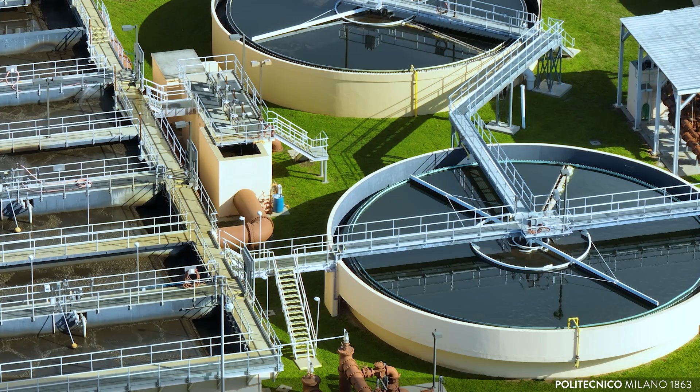In recent decades, wastewater treatment plants have undergone a profound evolution. There has been a significant increase in the required removal levels and an expansion of the range of pollutants to be treated. At the same time, increasing emphasis has been placed on process optimization, with the goal of reducing energy consumption and minimizing space requirements. Moreover, today wastewater is increasingly recognized as a valuable resource to be utilized for the recovery of energy and materials.

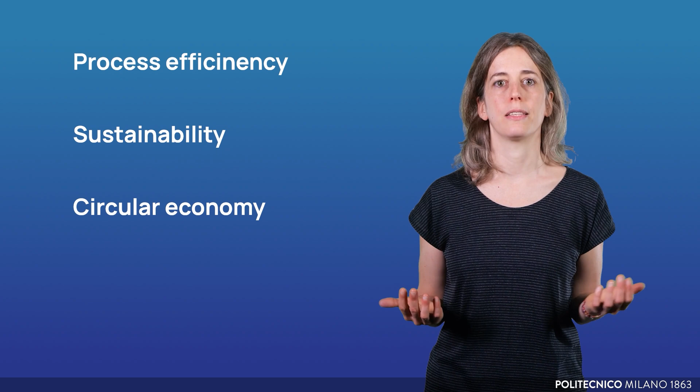The recent European Directive on Urban Wastewater Treatment, EU Directive 2024/3019, provides clear guidance in these directions, introducing particularly ambitious new objectives. In this lesson, we will analyze these changes, along with the strategies and the technologies currently available to achieve the proposed goals. In particular, we will focus on the implementation of innovative treatment solutions capable of combining process efficiency with the principles of sustainability and the circular economy. These solutions aim to address the challenges related to water and energy supply, the protection of natural resources, and the continuous improvement of quality standards.

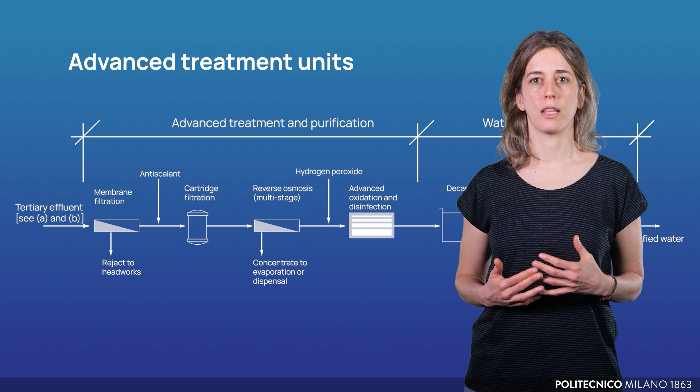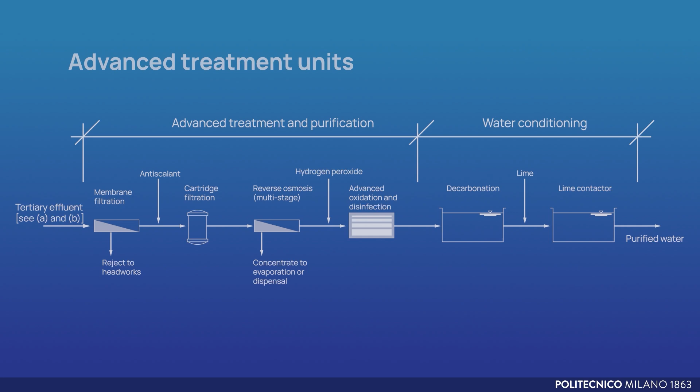Among the main challenges related to treatment efficiency are emerging contaminants, organic and inorganic substances present in wastewater even in small quantities, but potentially harmful to the environment and human health. To address this, advanced treatment units are now being used, generally positioned downstream of tertiary treatments. Based on physicochemical processes, these technologies are designed to remove residual microcontaminants, improving the quality of the final discharge and enabling the safe reuse of treated water. The processes used for the removal of these constituents can be divided into two main categories: mass transfer separation and chemical transformation.

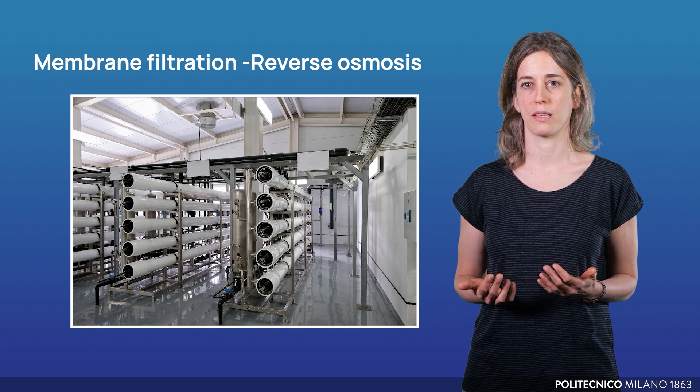The former generate concentrated streams that require subsequent management, treatment, or disposal. For example, adsorption involves the saturation of a solid medium, while membrane treatments produce a concentrated liquid waste, also known as brine. The latter are based on redox reactions that transform or destroy the contaminants. Although they require the dosing of reagents or the use of energy, they can theoretically achieve complete mineralization, except in cases of partial degradation. Among the most effective are advanced oxidation processes that use hydroxyl radicals or ultraviolet photons.

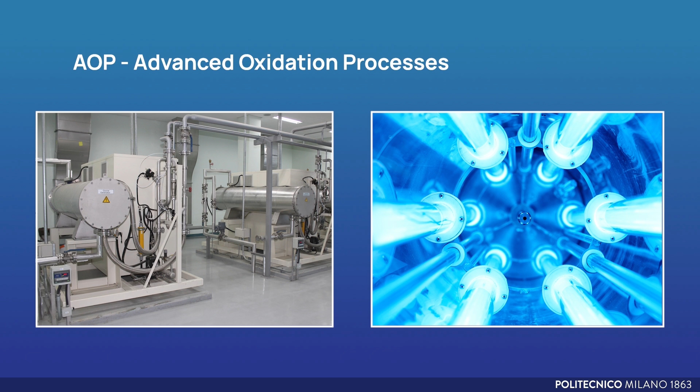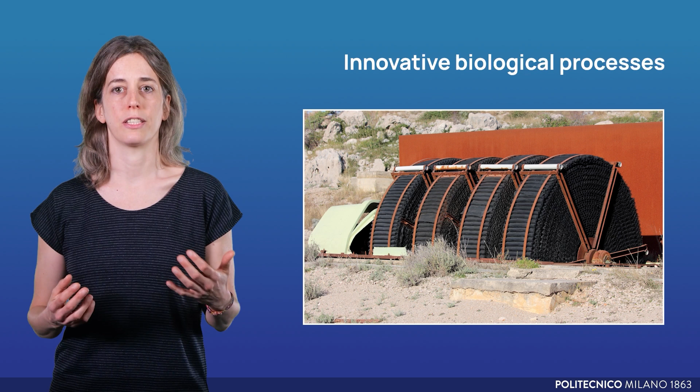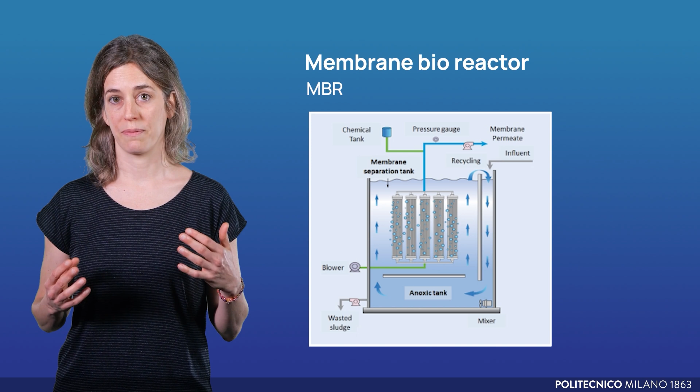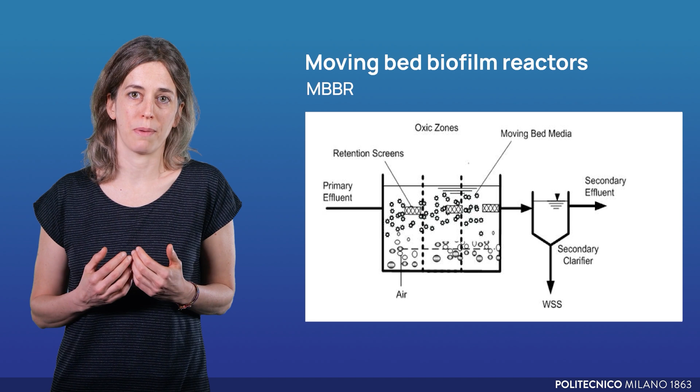In recent decades, there has also been a strong push for innovation in biological processes, with the aim of reducing the energy consumption associated with treatments, improving purification efficiency, optimizing space requirements, enhancing flexibility in response to variations in load and flow, and promoting resource recovery. Examples include membrane bioreactors, known as MBRs, and attached growth biomass systems, such as MBBRs. Both ensure a high-quality effluent and compact plant design. MBR reactors, however, involve higher energy and management costs related to aeration and membrane cleaning.

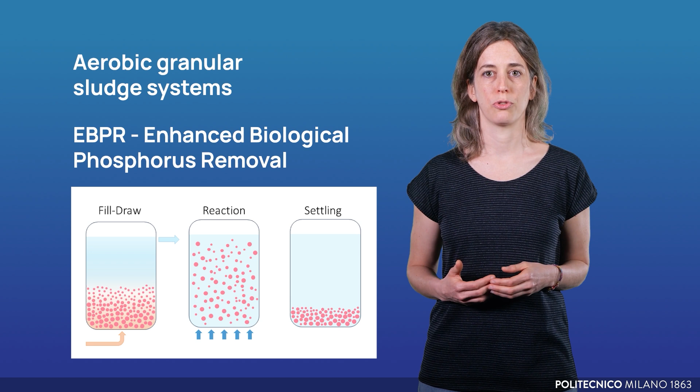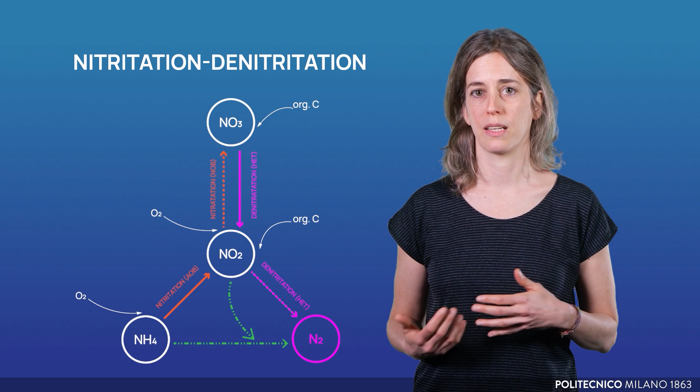Further innovations include aerobic granular sludge reactors and EBPR processes for advanced phosphorus removal. These technologies allow for a significant reduction in oxygen consumption, high sedimentation rates with smaller footprints, and more efficient microbiological selection, thus ensuring high performance. The removal of ammoniacal nitrogen from concentrated streams, such as sludge line recirculation flows, can be optimized using dedicated processes like partial nitritation denitritation or anaerobic autotrophic oxidation with an ANAMMOX biomass, reducing or even eliminating the need for oxygen and external carbon sources.

Finally, anaerobic processes are finding new applications not only in sludge digestion, but also in the treatment of high-strength wastewater, offering the advantage of biogas production and a reduction in the amount of sludge generated. This technological evolution reflects a growing trend toward compact, high-efficiency, and circular-oriented treatment plants. In this context, resource recovery, including carbon and phosphorus, plays a central role.

An increasingly important aspect in the management of water treatment plants is the minimization of energy consumption and the associated costs. In Italy, wastewater treatment plants account for about 2.3% of the national electricity consumption. About 60% of energy costs are related to aeration in biological processes, 15% to sludge treatment, and 13% to pumping. Achieving energy neutrality is possible through a combination of strategies aimed at reducing consumption and recovering energy,

including inventorying the energy use of all electrical equipment, adopting targeted maintenance programs, such as regular cleaning of air diffusers in biological tanks, implementing monitoring and control systems, for example for dosing oxygen or other reagents, recovering the chemical energy contained in the wastewater through anaerobic digestion or sludge incineration, when feasible in terms of flow rate and head, recovering the kinetic energy of water using microhydroelectric plants, and finally, recovering residual thermal energy through heat pumps, if the wastewater temperature and local environmental conditions allow.

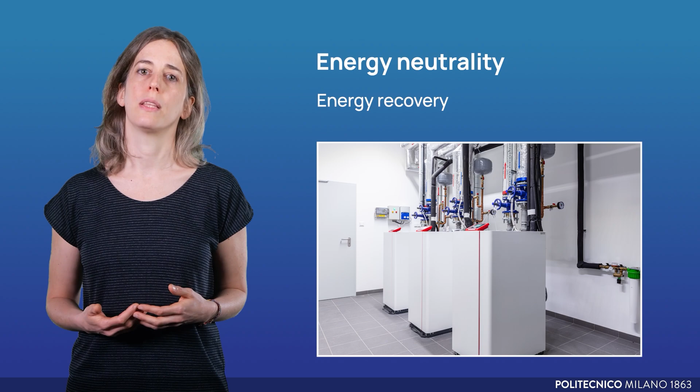As has been seen, wastewater treatment has now reached a very high level of complexity. In a constantly evolving context, it is necessary to rethink the design, management, and upgrading of wastewater treatment plants with an innovative approach, aiming to ensure efficiency, sustainability, and reliability in the treatment systems of the future.